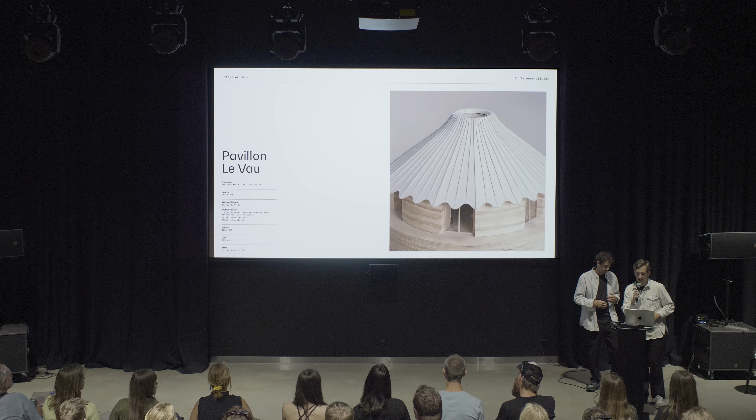Hello. So this is, like David said, our first public project. It's an educational pavilion for a public school in Paris, designed to welcome parents, children, and teachers. But before, I will share a story with you, because the story begins before we started working on the project.

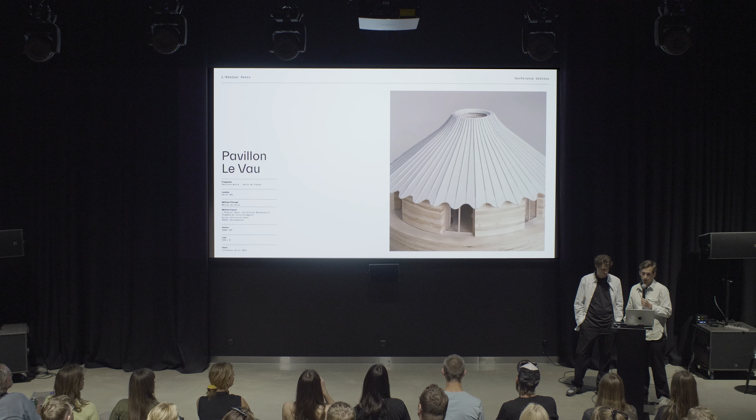The school's teaching staff told us that they had difficulties inviting parents into the school grounds. Some parents feel distrustful of the educational institution. At the same time in Paris, the Paris City Hall launched a program called Oasis to replant the courtyards of Parisian schools. The goal is to fight global warming.

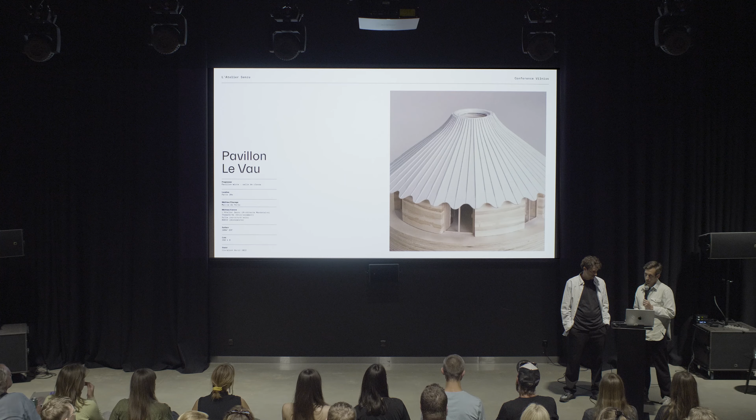Our school benefited from the Oasis program with the installation of a vegetable garden or picnic area. And to everyone's surprise, the parents of the students showed a great interest in using these planted spaces. This is because they often live in small social housing, without balconies and gardens.

The client saw in this context an opportunity to create a connection between the school and the neighborhood. This is why they proposed an architectural project to welcome parents into schools.

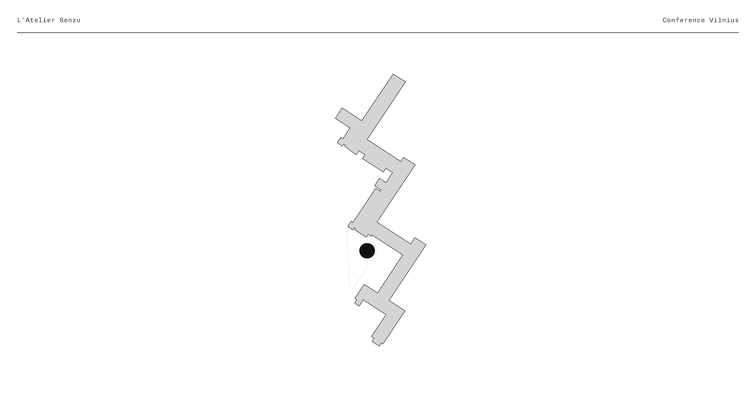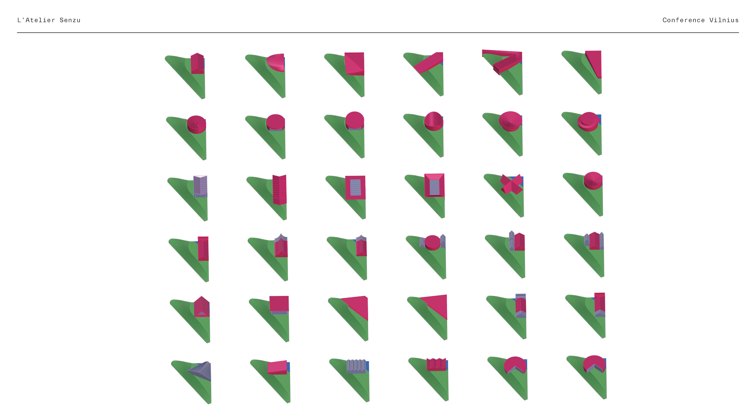I would like to talk about our method to produce architecture. This is the method we use to produce our projects. It's like Darwin's theory. We generate as many options as possible, and based on the parameters and constraints, we eliminate the options that don't work. Then we add even more constraints to eliminate once again a few more options. And in the end, only one remains, the one that has survived all the constraints.

All the topics are the same for the roof, for instance. We do a lot of models to work with our clients, a lot of material prototypes.

This guy is to explain more about the historic context in France. This man named Jules Ferry is very well known. He was a minister during the 19th century. And thanks to him, school is now mandatory. Since then, schools have all looked the same.

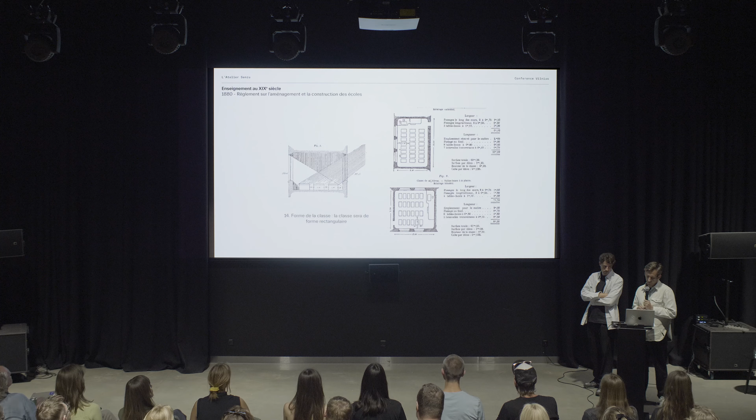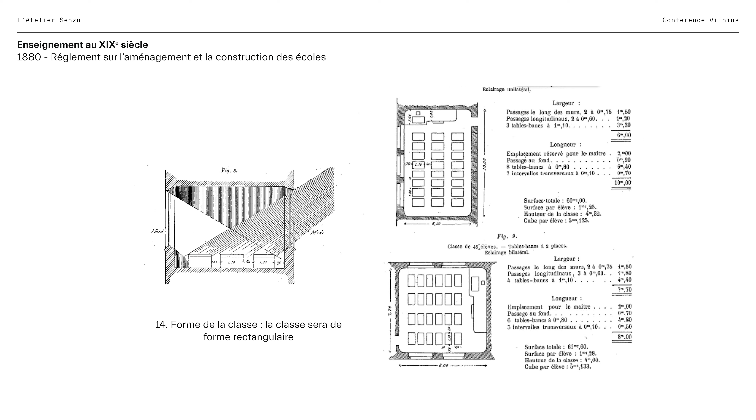The classroom is rectangular, with a large window on the left so as not to overshadow the people on the right-hand side. There is a large corridor and a large courtyard. And today, schools in France are all the same.

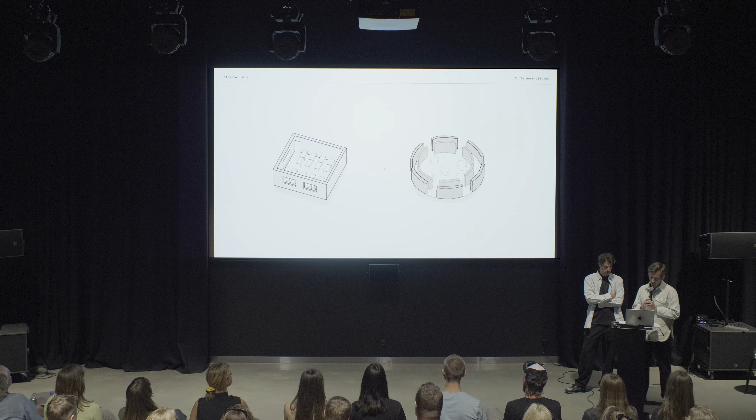This is why we decided to imagine a round classroom. We are questioning the relationship between the pedagogy, the geometry, and the knowledge transmission. In the round shape, there is no first and last row. The circle is the natural shape for forming a group of individuals.

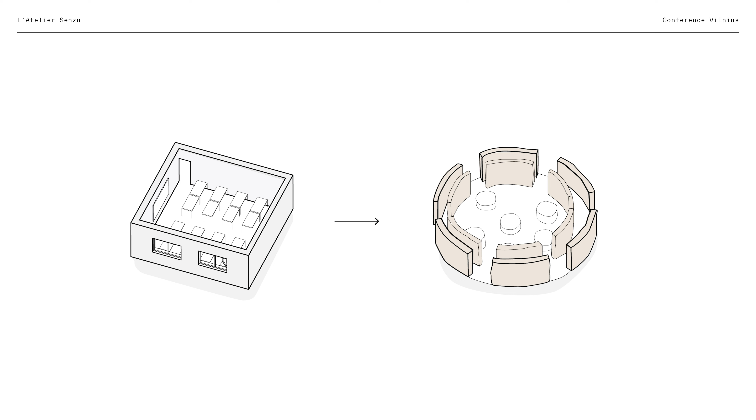Now this is the main plan. Actually, there is just one, because it's a little project, a little pavilion. And as you can see, there is a circle plan. It is a multi-purpose pavilion.

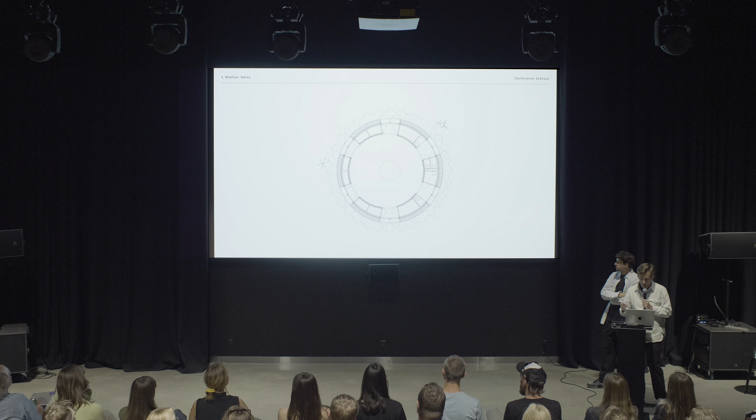So a lot of storage is needed. We organize a technical belt with all the necessary facilities. Toilets is here, toilets, storage here, kitchen, sink, and technical rooms.

As you can see, the center of the building does not match the center of the classroom. The depth requirements for the storage and the toilets are not the same. This way, we offer multiple uses on the periphery.

As you can see, there are several layers. The first is a terracotta wall to provide spatial separation and thermal inertia. The second layer is related to uses like storage, and finally, the insulation and the outer wall.

On the outside now, with the round classroom, the pavilion's shape also has to be round. With the round pavilion, there is no primary and secondary facade. The entire facade is primary.

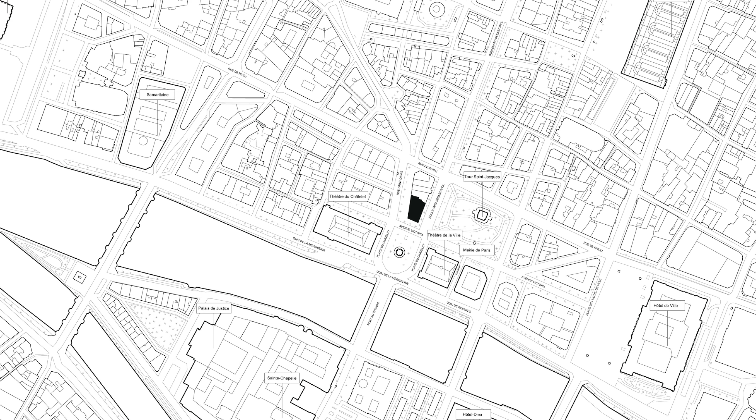It's like the center of the center of the center of Paris. Between the two big theaters, you have the city hall just here. So it's a building that all the Parisians pass by, and of course all the historical and preservation people from the city are also looking and annoying us.

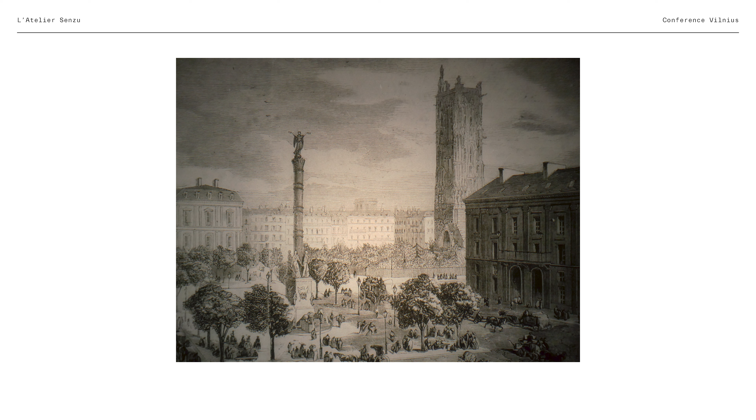So it was built during the mid 19th century, before the two big theaters. It's actually one of the first steel buildings in Paris. The former architect used to travel a lot in the UK to see how steel construction was going on.

You can see Tour Saint-Jacques in the back of the picture. And so the way the building was built - sorry for the pixelation of the images - but when the building was built, it had three components.

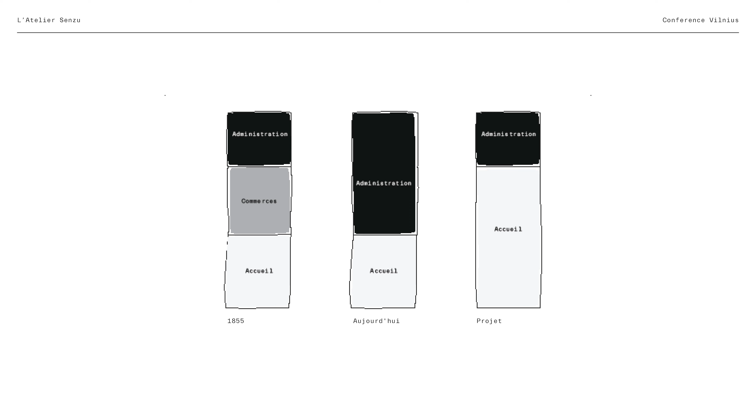You had administration, you had some retail on the ground floor to finance the company, and you also had a part for public receptions. When the competition was launched, the building was actually mainly administration, mainly offices, and what was left was for public reception. So the idea of our project was to reinvert the logic of the building by condensing the administration part to make more room for public receptions.

So we worked a lot on the plans to understand the logic of the building. What was done at that time is that you always had part of the building about public reception, and the rest that was more like a machine, something to make everything work for the public receptions.

And what we did to win the competition is that we created new floor plans, new floors in the back of the building, in order to make room for public reception on the ground floor, which is connected to the public space.

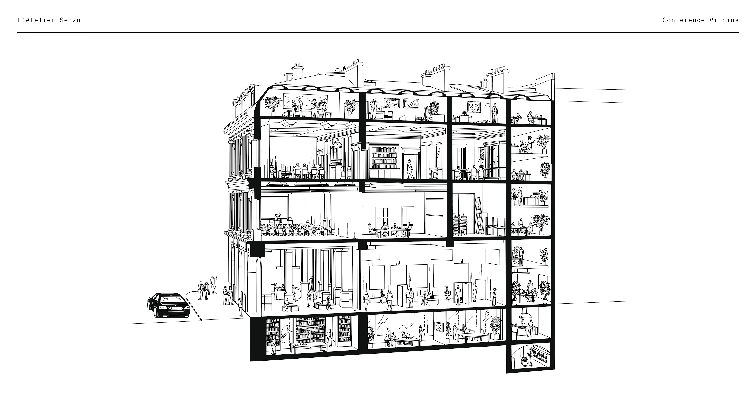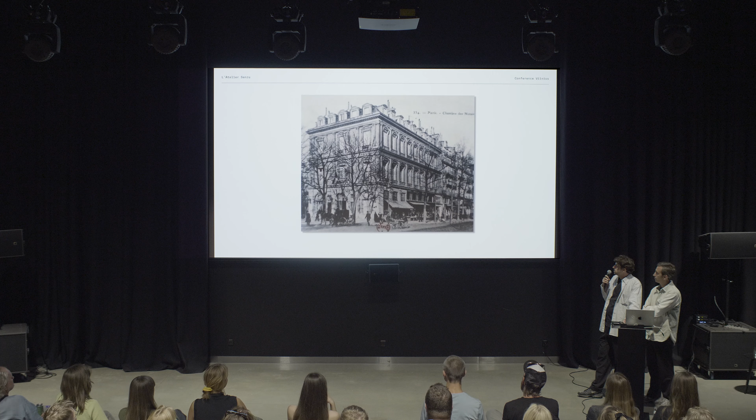We found these pictures from 1906, I think, where we had a very intense relation from the building to its context that was completely lost. And so the idea is: how can a building contribute to the public space.

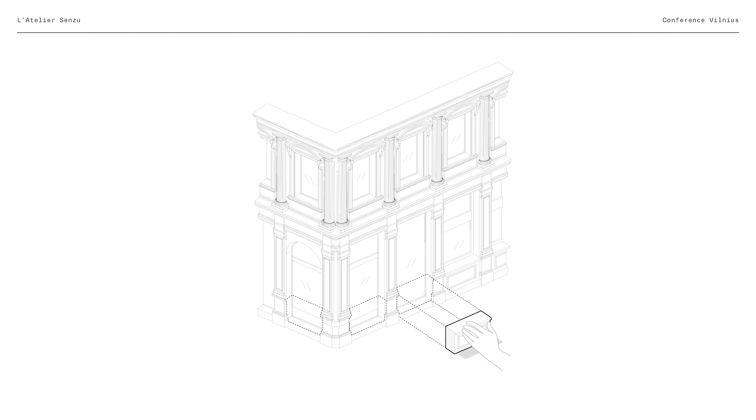So the first action is actually to remove all the bottom part of the windows that was made out of stones, in order to have more visual connection to the surroundings. That's our project on the ground floor.

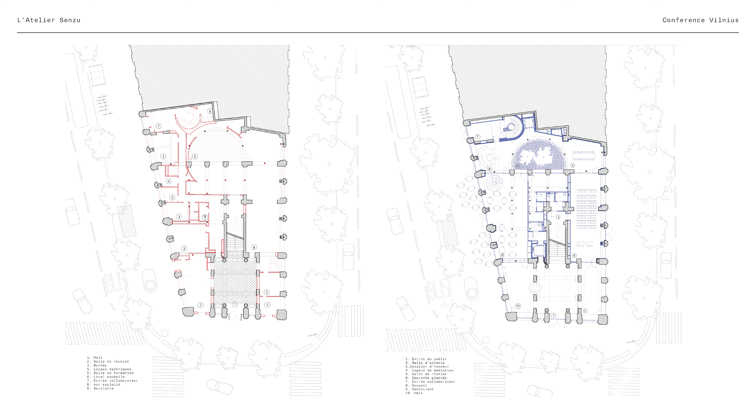So we somehow condensed everything in the center in order to have 4 big programs on the ground floor, so a bigger hall. Some conferences that could be done on the right side of the plan, and on the left side a restaurant, and then in the back some kind of free office space for notaries.

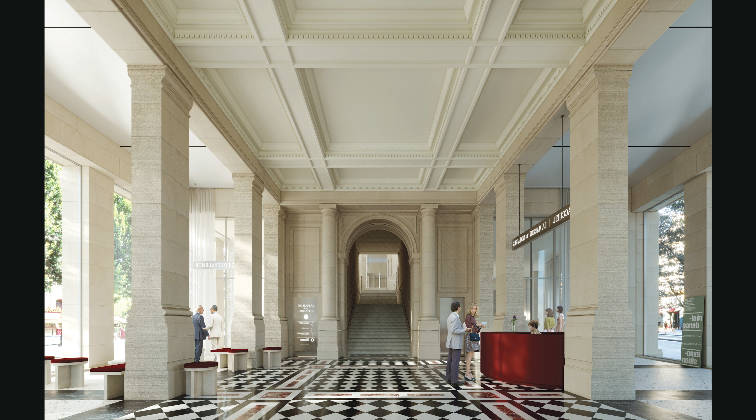So that was the interior hall as we found it, and we wanted to make it as big as possible. So we removed basically all the stone walls from the hall in order to have a 3-facade hall.

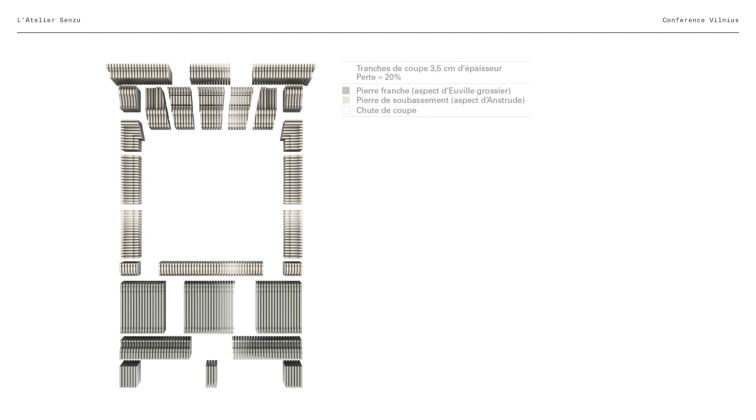And some people are going to say, okay, what are you going to do with all that stone? So we actually managed to reuse all the stones that were deconstructed on site. We worked with a designer called Anna Saint-Pierre on this topic. We really like to work with designers also, because I think they're sharing the same vision as us, and they have the same questions about our future.

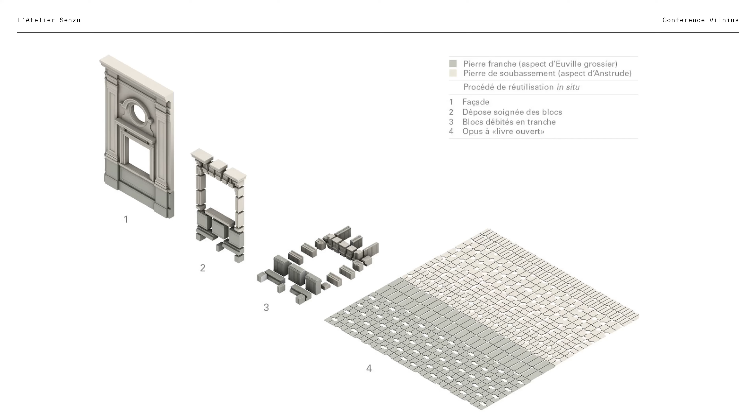And so very neatly we somehow removed all of the stone decorative elements, and we did some kind of a carpaccio of all these stones in order to create new pavement on all the ground floor of the project.

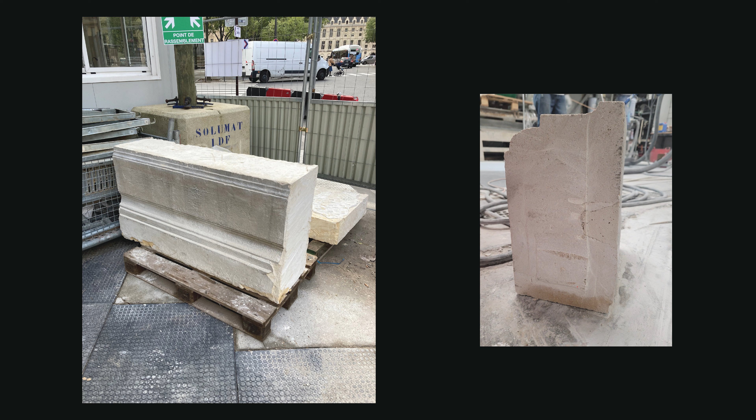And the nice thing about this decorative molding of the facade is that it allows you to create some patterns that we would have never done without this configuration. So this is the stones we removed from the facade. Here you can see the contour of those elements that creates the patterns on the floor. And on the right you can see also we also try to use as many waste of the building as we can.

So on the right you see also some pozzolan, which is a volcanic stone that were in the building that we had to remove, and also some other waste of the building that we used to create some terrazzo.

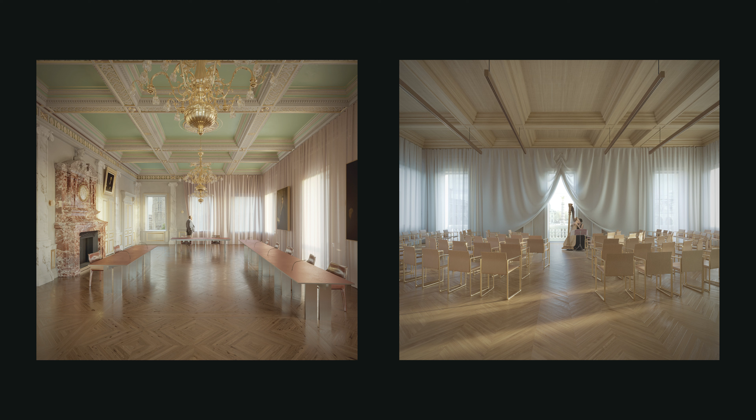We had those also very decorated rooms, and when you work on this type of project with very decorative interiors, but you also have stones on the outside, the question is how and where do you put your insulation? Because of course it's not insulated. And so we worked with our environment consultant to find a solution that could work and make the building more performative.

And so we thought that maybe we can just dig into the past and see how they used to insulate their building. So we thought that, okay, maybe we can use curtains to insulate our building. We will use two types of curtains, a heavy one and a light one. The heavy one will be in front of the walls during the winter in order to avoid having the heat leaving the room. And during the summer, you have a light one that will go in front of the windows in order to avoid sunlight in the room.

And that was, we didn't invent it. We just looked at what was done in the past, and in castles and this type of building, you always found some carpet on the wall and stuff like that, just to make it nice, but also to insulate your room. But we can also do it in a contemporary way. So it's like, how do you pick elements from the past that you can appropriate yourself in order to make the building more performative?

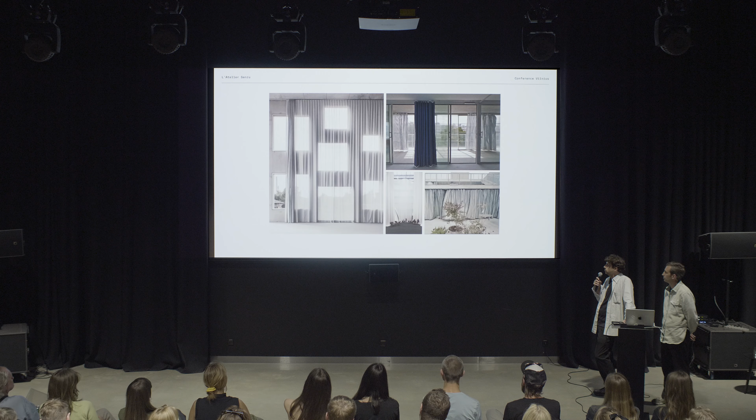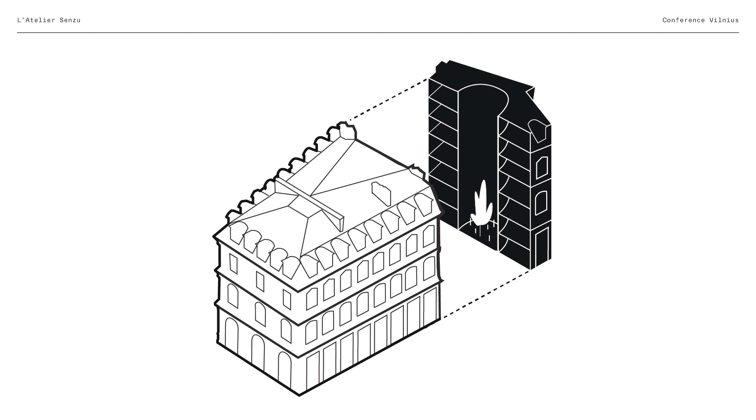And on the back of the building, that's where we will do these brand new offices with contemporary conditions. So that's how it used to look, just a very basic plaster facade. And that was the configuration that we found on the left side. As you can see, everything is super messy, with a lot of small rooms with small windows. So you have terrible lighting conditions for working.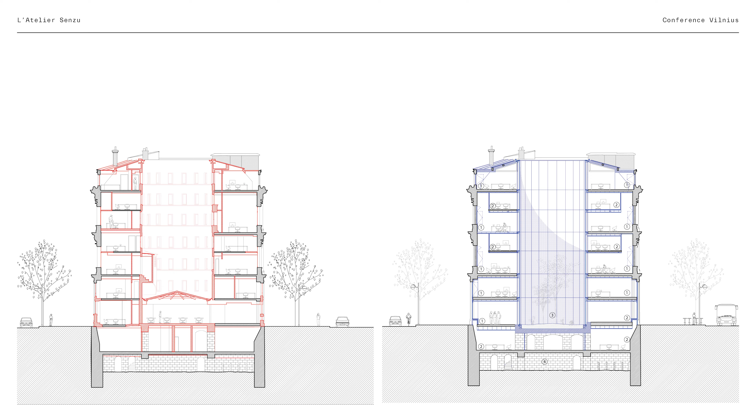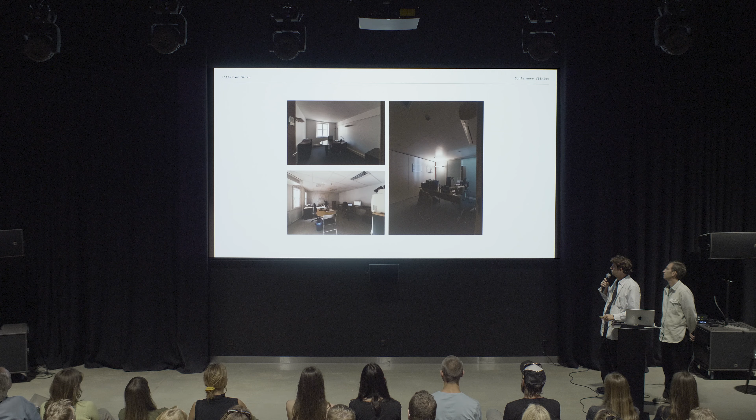And so we tried to rationalize the back of the building, and you also had this funny situation here where you had windows at floor level. So we somehow removed the floor here in order to have very nice windows and a mezzanine. So that's what the offices look like. So this is the difference in lighting situation.

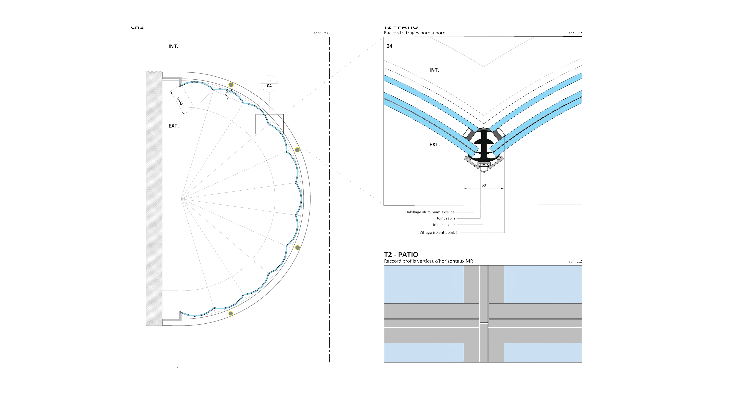And what was interesting with this curtain wall is, of course, to make something that looks interesting, but also it was interesting because it could allow us to not have any mullions on the vertical side, because everything is attached on top and at the bottom, and so it's stable itself because of the curve. And so we are just trying to avoid letting water go inside the glass wall.

So everything has to be extremely precise. Everything is done with metal, because we wanted to work with metal, as it somehow made sense with the history of the building. It wouldn't have made sense in terms of carbon footprint, but in terms of history and the relation with the building, we really wanted to continue this steel and metal structure.

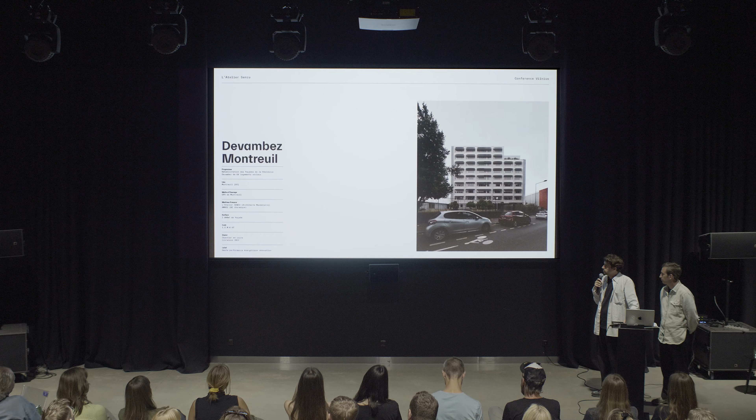Also a very, very different situation here. We are in the suburbs of Paris. This is for social housing. So this is our building in the middle, in front of a big urban block. And this building used to be an office building, and it has been turned into housing 25 years ago. It has been bought by the social housing company, and it has been turned into housing.

And we intervened in the third phase of making the building more performative, and also trying to make it look more like housing and less like an office. There was a big issue with the performance of the building because it was the same temperature inside as outside.

It's basically the same type of project as the project of Lacaton & Vassal in Bordeaux, but with 3 times less money. So we had to be very smart on the way to use that money because we didn't have that much. So we just repaired what was not working.

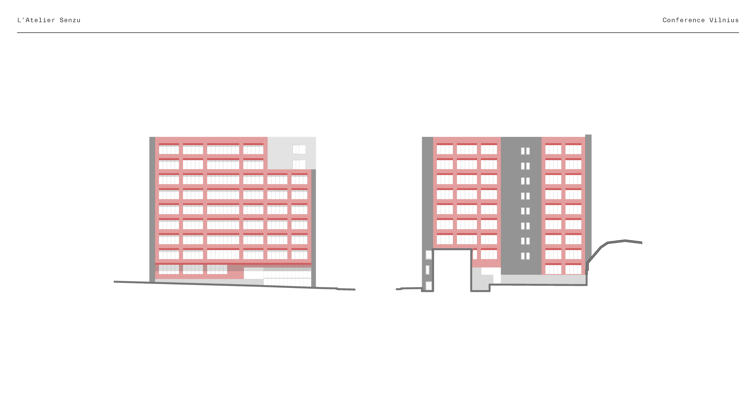We didn't, because in this type of project, all the architects are putting like the whole puff down coat on their building. But we just intervened where the curtain wall was, in order to be performant where we intervene. So it's more about this idea of repairing than transforming. We are very attached to this idea of repairing, not the big gesture of the star architect, just to intervene very precisely where the building needs to be repaired.

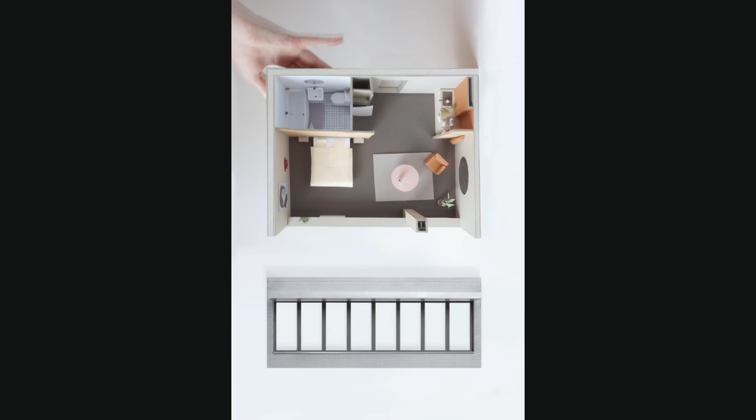We also had to intervene where people were living, so we had to be very careful on the way we were doing this project. That's why we have these big windows, because the big window is corresponding to one apartment, so we could make sure that we could have everything dry in a day.

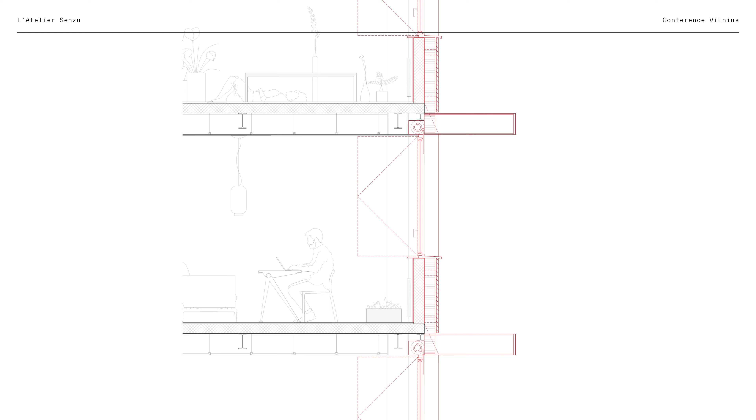It's also about what type of document can help the architect in the conception of this building. For this project, we were really interested in this section. We had one thickness that we could work on, and so we were interested in adding a lot of uses with just one surface. We added shading because we were south facing.

We also added some concrete blocks in order to add inertia in the apartment. We also added a little bit of room to put books and stuff like that. So it's like how with just one surface you can create multiple uses.

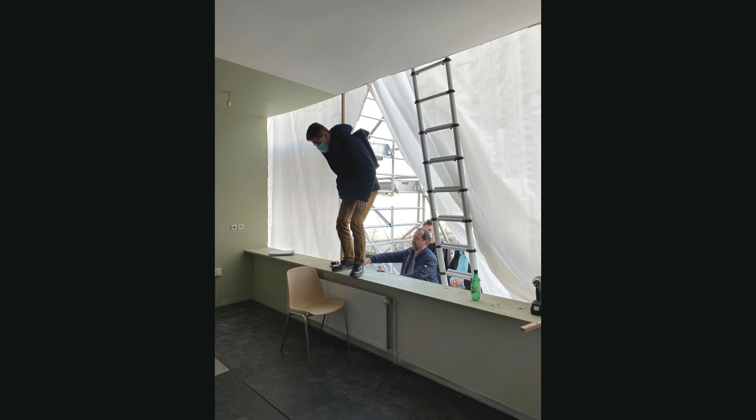What is also very interesting with the transformation of offices into housing is that you can now have 3 meter high apartments, which in France is very rare, unless you live in a very rich neighborhood. All the new apartments are like 2.5 meters high. So this is also an opportunity for us to do housing in a different way, to live in a different type of apartment, and to not live in this standard life.

Still with this question of repairing technosphere elements, we were interested in using very basic and cheap elements. Those are stuff that you usually use for ventilated facades. For instance, people usually use plaster, but plaster when you work while the building is occupied is very complicated to make, and also very complicated to repair.

With this type of material, it's very easy to fix, to unfix, to repair, and also in 30, 50, 100 years, when the building won't be good anymore, we could just deassemble the facade and reuse and recycle everything.

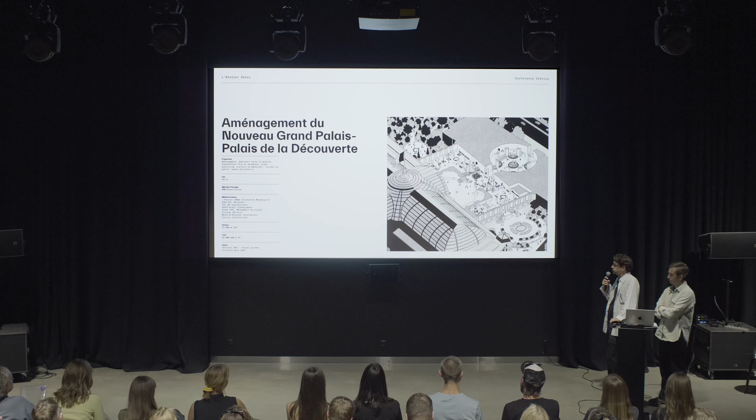So the last project is basically the synthesis of a bunch of our projects. It's really the combination of this idea of using biosphere elements and technosphere elements, because if you use biosphere elements such as wood, stones, earth, you can just put them back to nature without doing any damage. And if you use technosphere elements, you can either source elements that are already recycled, or upcycle them through industrial processes.

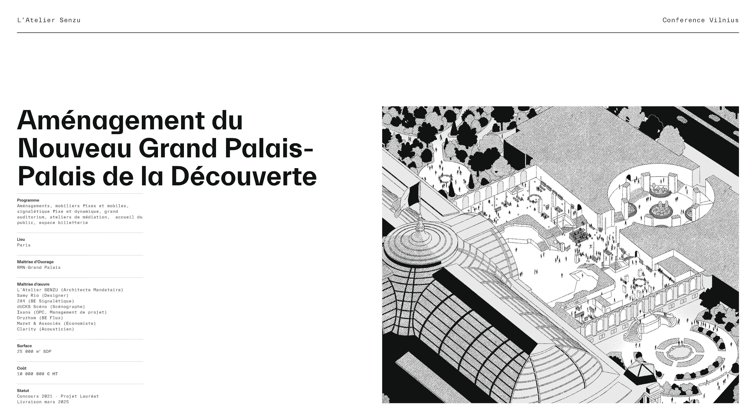The Grand Palais, I don't know if you know this project, it's one of the biggest monuments in Paris, along with the Eiffel Tower and Arc de Triomphe and this type of buildings. Every 15, 20, 30 years, the building is completely redone.

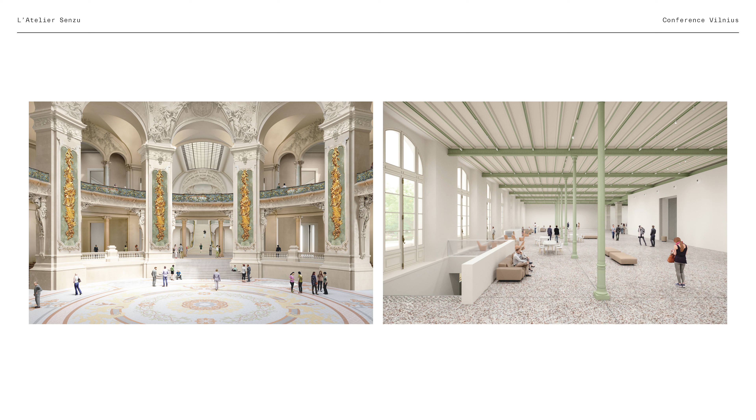So we said to our client, it was a competition, we said it's not so much about what we're going to do now, it's mainly about what type of waste we want to have in 30 years. So this is the type of spaces we have to intervene in, to create new interior layout, new furniture, new signage.

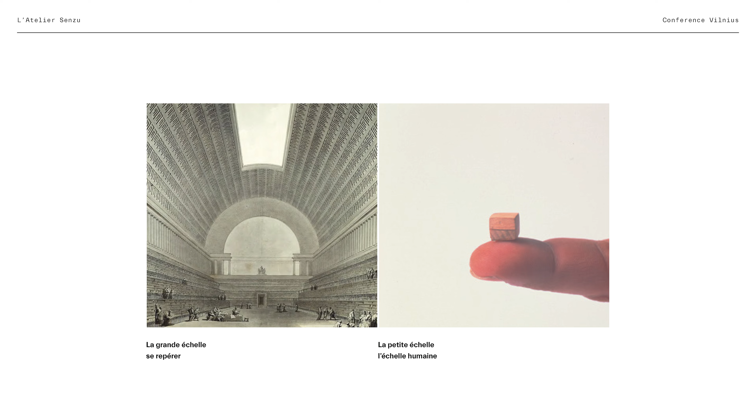And in this building, the spaces are enormous, they are monumental. So we thought that it would be interesting to play with these two scales, the big scale that helps you find your way, but also the small scale to pay attention to the users at every time.

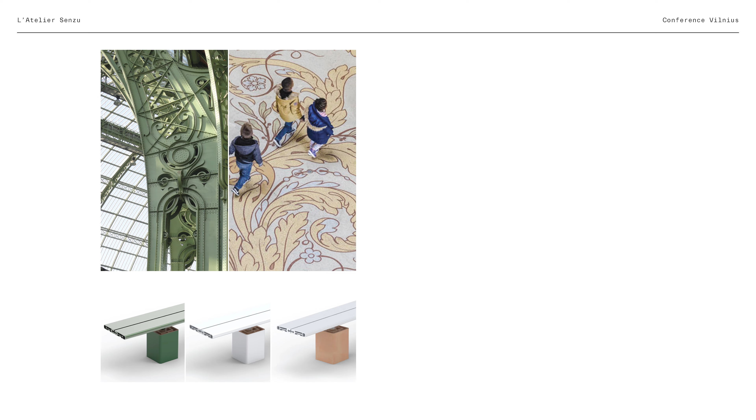We were interested in using biosphere and technosphere materials, also because they were present on site. On the left, you can see the steel structure, and on the right, you can see some ornamental floor made out of mosaics, which are made out of clay. So we thought it would be interesting to mix those two elements in order to make something ecological, but that would also make sense in this building.

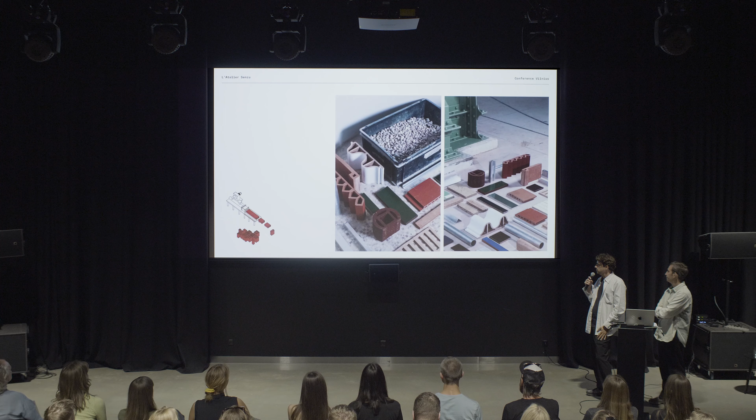Those two elements and materials share the same technique, which is extrusion. You can see a small diagram here. The amazing thing about extrusion is that you use the exact amount of material you need to do the things you want to do.

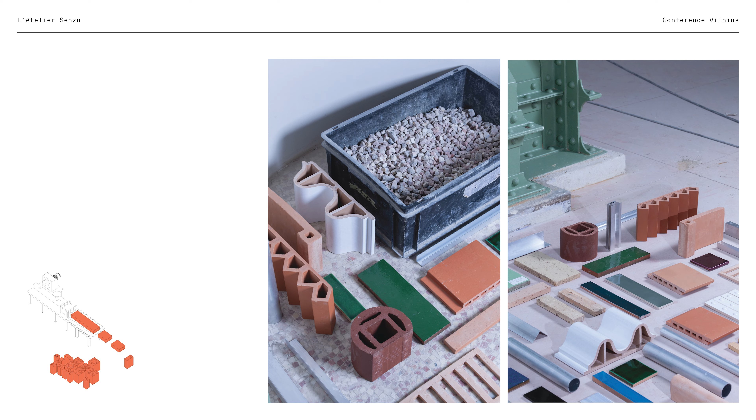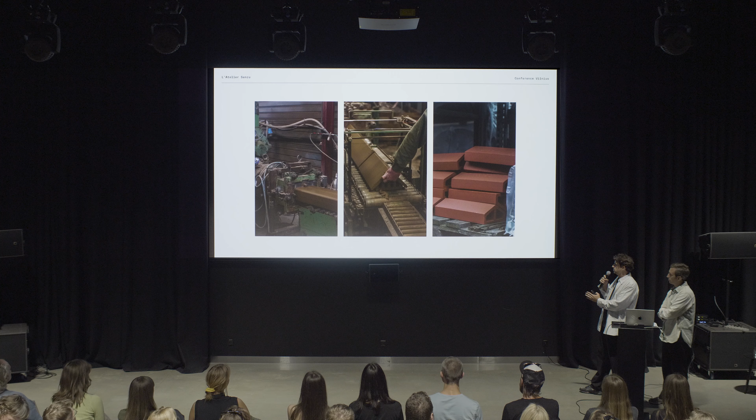And the nice thing about this is that we are working with a designer on signage, and we can share the same techniques in order to create the same identity for the entire building. So it's like 70,000 square meters to animate.

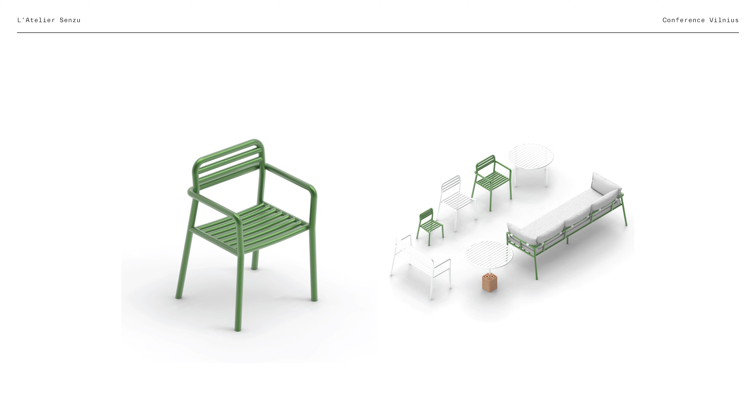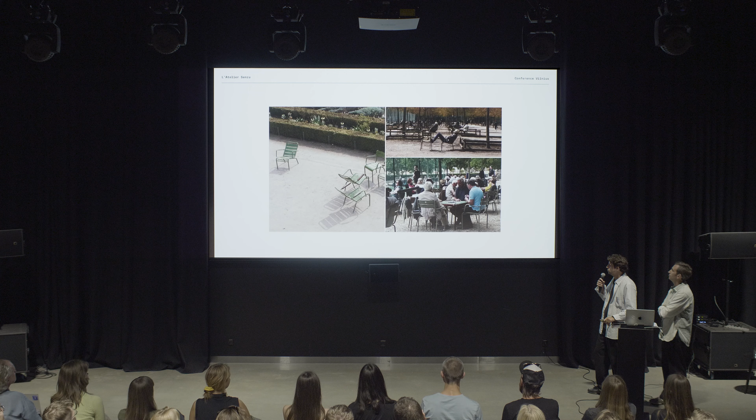We were also interested in creating a chair that could live like the ones we have in some Parisian parks. The nice thing is that at the end of the day you see what the uses were in the garden during the day. This building is so big that it's very hard to feel comfortable in it, and with the use of this chair that you can move around, it helps people appropriate the building. So this is how the chair looks like.

It's 100% recycled aluminum, and it somehow echoes with the ceiling of the building, which you'll see later.

So I'm going to give you a little tour of the museum. First we'll start with the entrance, because this is on the left. You see how you used to get into the building, and this is now how you get into the building with the security checkpoint.

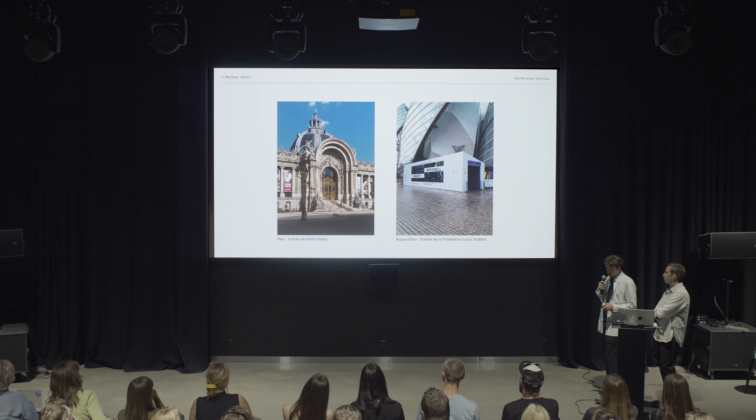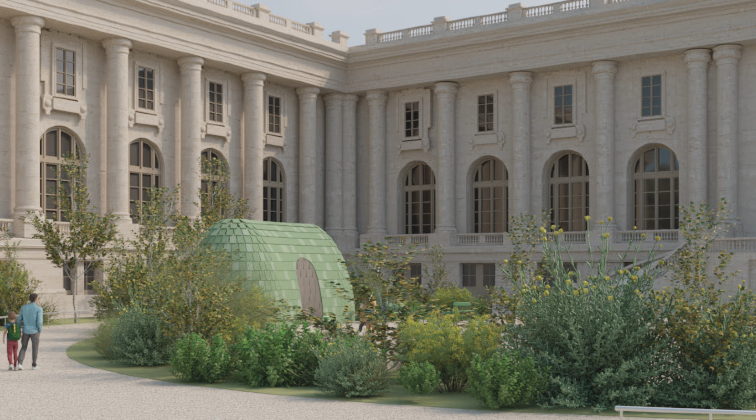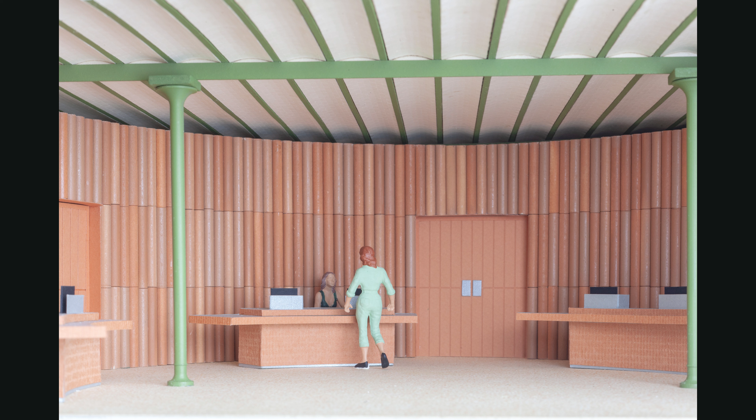Then you go to the ticket space, which is made out of extruded circular shapes stacked on top of each other, so it's also a new way to create walls without using plaster, and the tectonic of this wall supports itself.

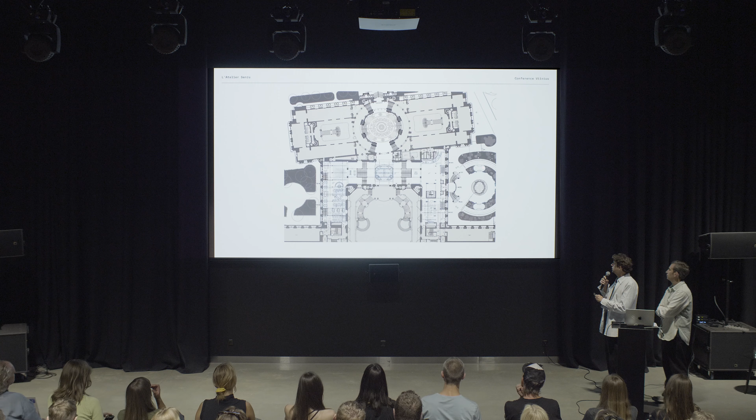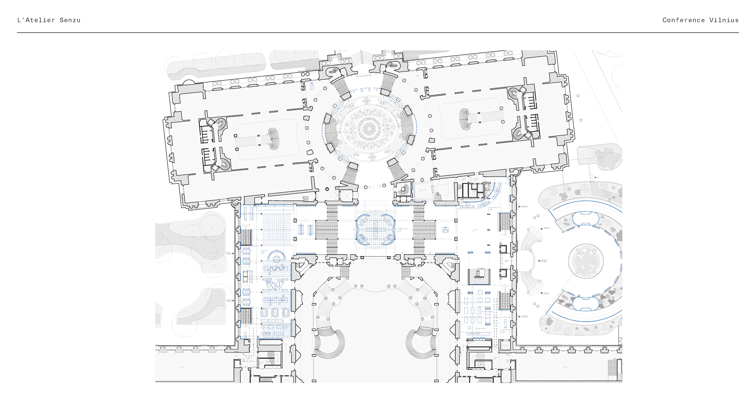We are basically working on the interface between two museums, two different publics, two different types of people interested in different things, and how they can live together. We thought this ecological approach could benefit both institutions. So, as I said, you have some big elements here, and then some small ones.

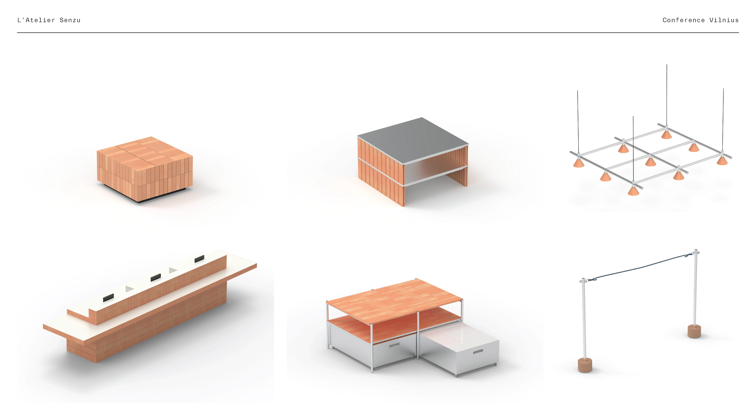So it's always this combination of creating new types of walls using extrusion to create new types of furniture, always using the material for its tectonic existence. So this is some boutique.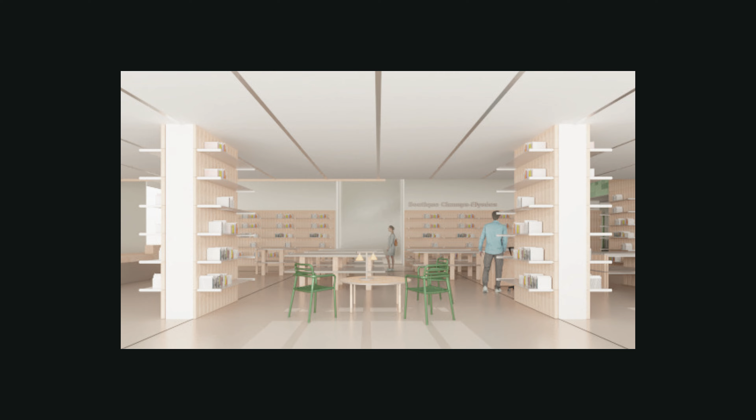Everything could be assembled and disassembled, so everything pretty much works with gravity. It's just a stack of elements that works together, so when they're done with this project, they can just separate things and put them in different garbage streams.

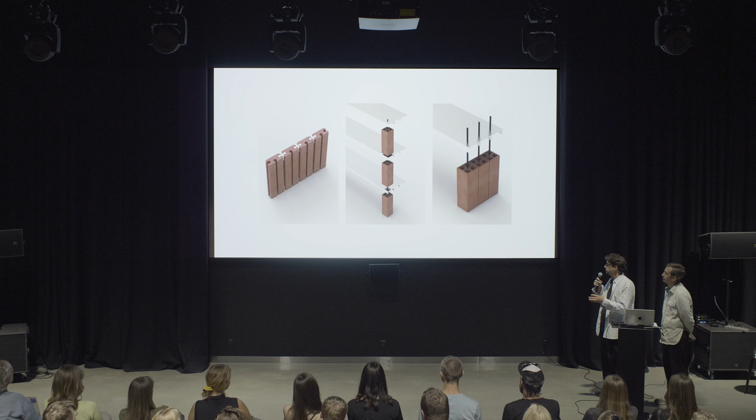This is also a kind of curtain that we worked on with Petra Blaisse, the Dutch designer, made out of terracotta.

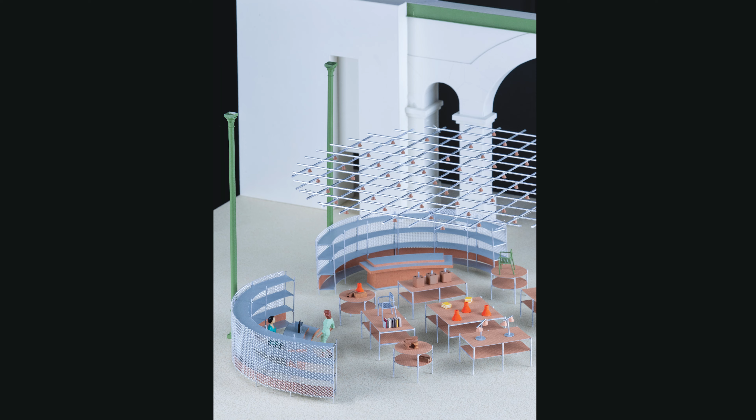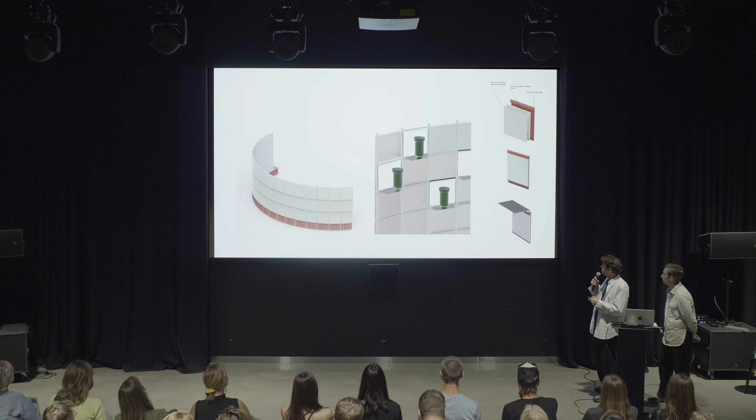So this was also one of the main boutiques. Everything, as you can see here, is extruded with a small hole to attach small aluminum plates, in order to create a kind of niche to present objects.

Some lockers. Also, everything is made out of terracotta, even the handles here, even the ventilation grid is also made out of terracotta.

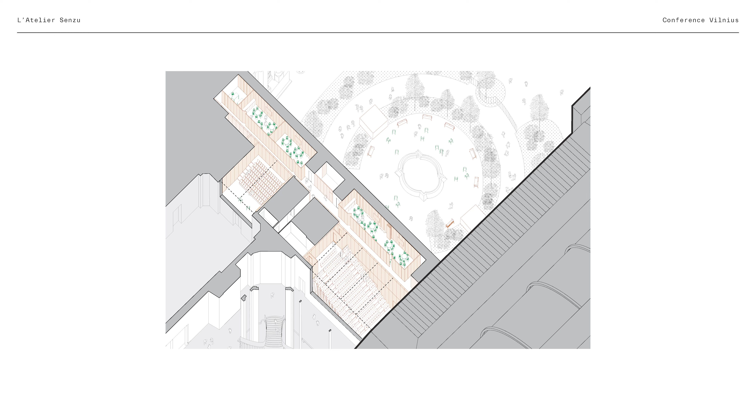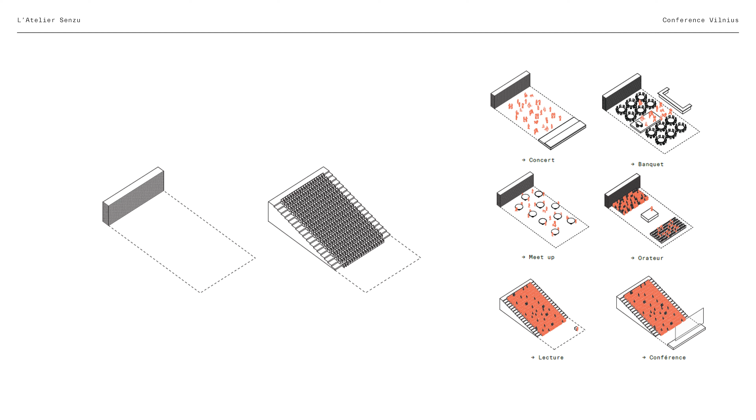The auditorium and mediation rooms are now under construction. So we somehow managed to create all types of uses in this space.

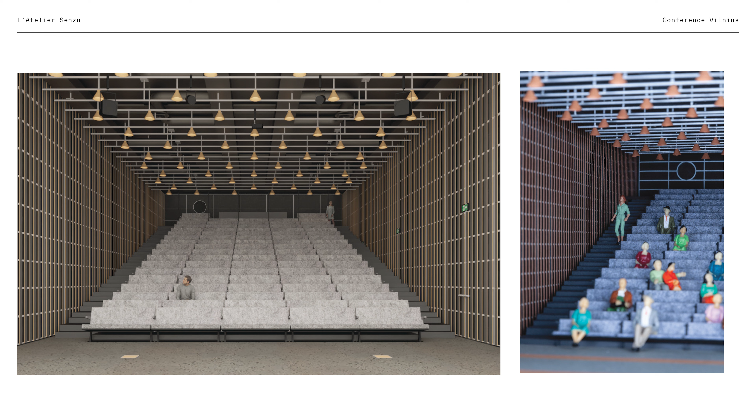Everything is also made out of terracotta brick, supported by aluminum elements, and we also designed some kind of terracotta lamps. This one is a more earthy version, with some earth panels in the same color as the nef of the Grand Palais.